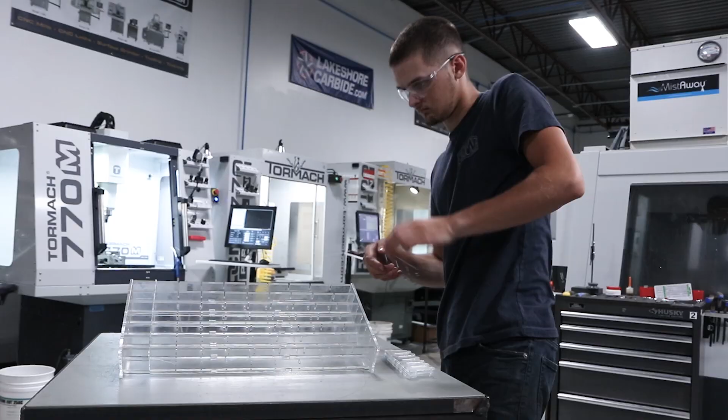Hi folks, let's walk through how we put together our Deltronic's parametric pin rack. I think this project is awesome because it really highlights just how powerful and amazing parametric CAD can be. And I think this sort of a storage device can be really helpful for any machine shop.

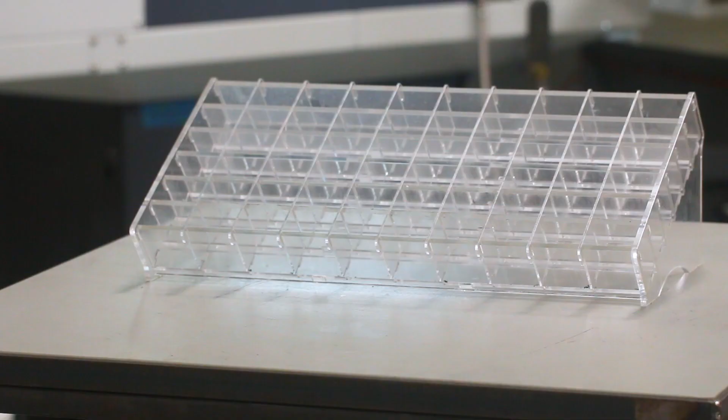The one you see here came out of a need to organize these Deltronic's pin gauges. We care a lot about the diameter of the bores on our Saunders Machine Works fixture plates. We machine them with a digital boring head, and we want to hold a really accurate tolerance. So we use a combination of metrology tools to check those diameters.

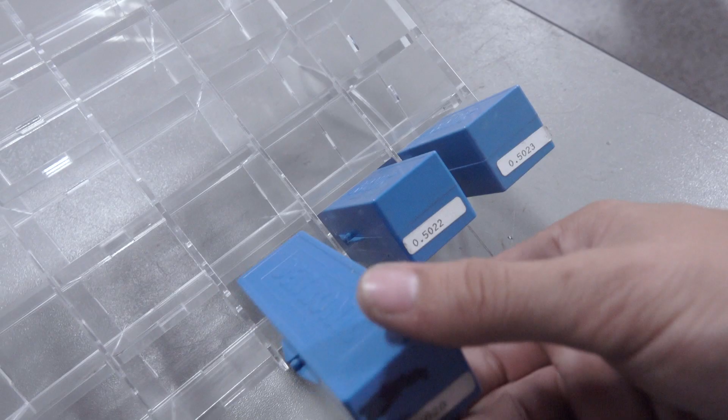The way in which you hold a bore gauge or the way in which you sweep it across can actually give you a slightly different reading. As we collected more of these gauge pins, though, I realized we need a way to organize these. And so Ed came up with this rack.

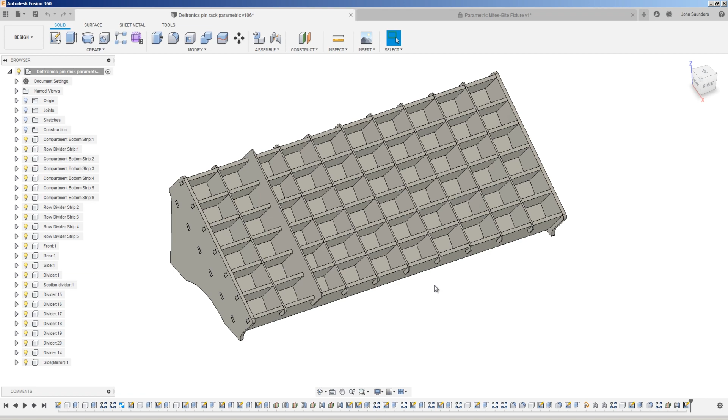And the reason I think this project is awesome, and we're sharing the file on the NYC CNC site, is under Modify, Change Parameters. This whole rack is built with user adjustable parametric values. So it literally takes seconds to update the number of bins, the width, the rack height, the angle, the depth, the dimension, the thickness, which makes this an awesome tool.

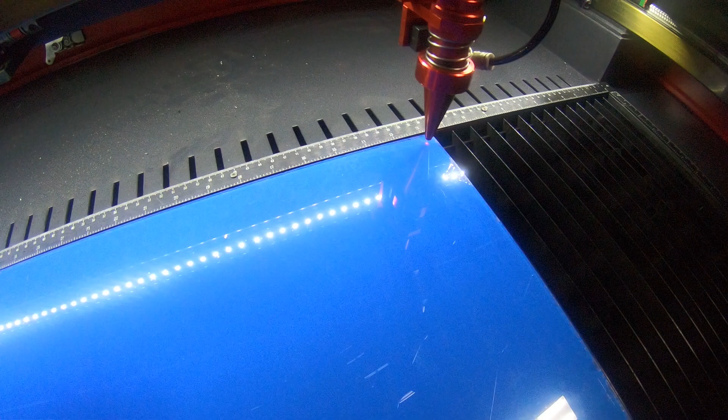And if you have a CO2 laser in your shop, you can make one of these for incredibly cheap. If you don't, you can either sub it out, send it out to a shop that has a laser, check out a makerspace that has a laser, or you could also make one with a 3D printer or a CNC machine, especially a router style, but really it's best suited for a laser.

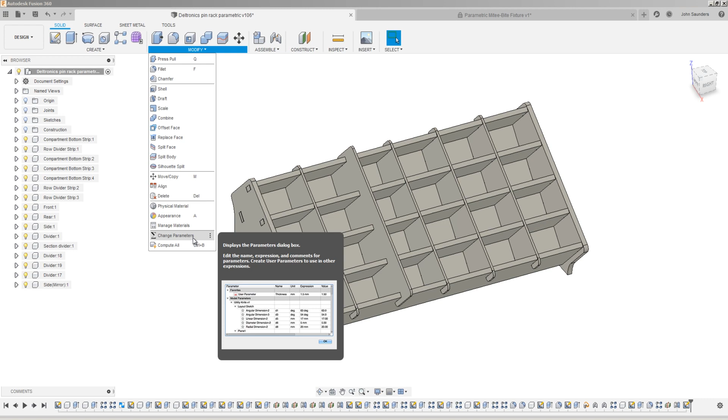So if you've never seen this change parameters or user parameters before, let me walk you through a really good example. If you head into your Fusion 360 data panel, scroll all the way down to CAM samples, work holding, yours truly, Saunders Machine Works, we created this parametric Mitee-Bite fixture. It's a relatively simple fixture that you can build.

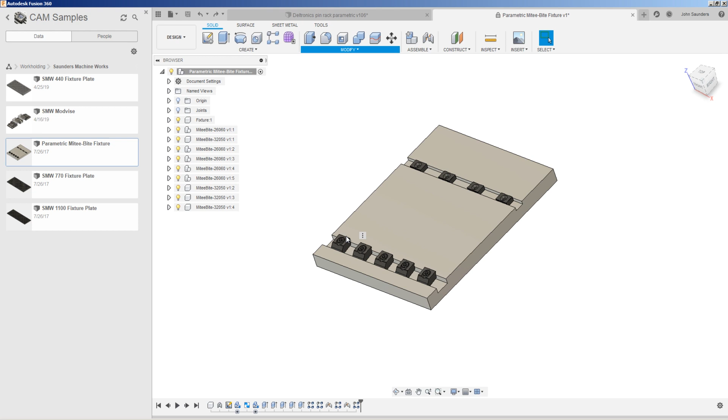It can be mounted directly to a fixture plate or held in a vise, but it's a good example of the value of using user parameters because we designed this so that it's much more intuitive for you to go in and make modifications. So having everything named with an intelligent name, a name that means something, makes it much easier to make edits to this file.

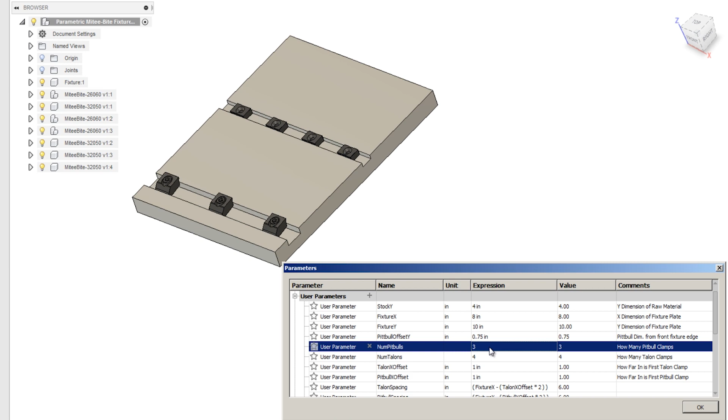So in this case, I have a stock Y of 3 inches. So that's the piece of raw material that we're putting in here. Let's say it's actually 4 inches. Update that. Everything moves. Let's say we're only going to use 3 pit bulls and not 5. Hit 3, it adjusts. Hit 2, it adjusts. Hit 5, it goes back. So we're going to adjust how far in is the first talon grip. Let's change that from 1 inch to 2 inches.

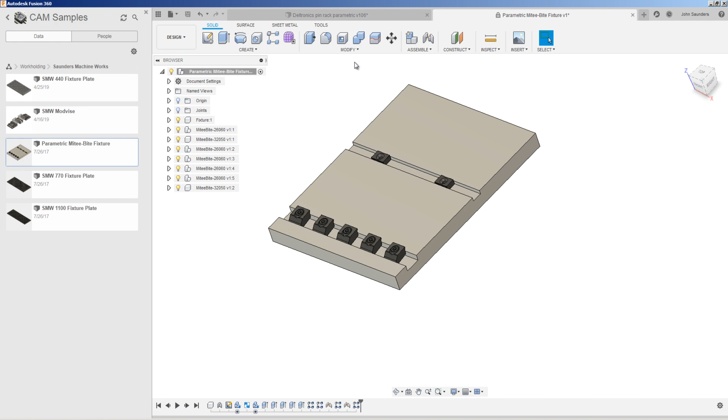It moves them in. Let's say you're a knife maker and you're building a knife and you're thinking, well, I don't need parametric values because we're not going to be updating these over time. Let's say the pivot pin diameter is always going to be 0.236. Well, I would argue think about still using that because it can really help as you're building out your CAD file or working in a team environment.

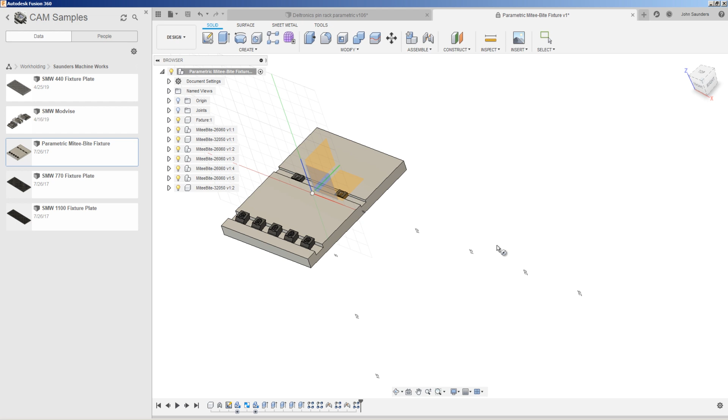Let's create a user parameter called pivot dia, and we'll say it's inches 0.236, and we'll say the comment pivot pin diameter. Now, when we go to say model up our knife handle, and let's say we've got our handle and we create the pivot pin circle, instead of using an inch value, just start typing P and it auto-populates a list of your user parameters.

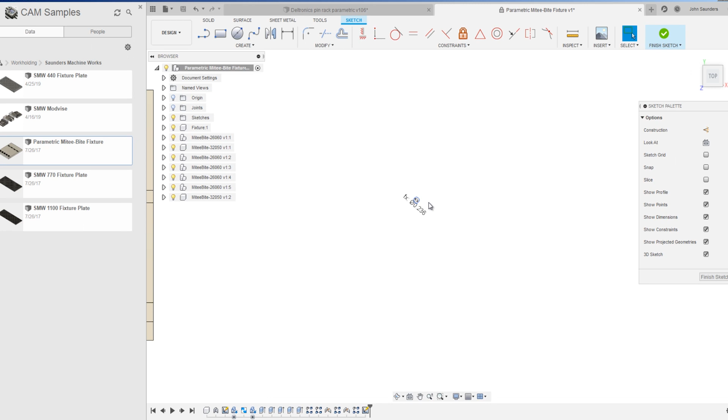Come down here to pivot diameter, hit enter, and now it's listed as FX 0.236. But if you double-click it, you can see it's listed as pivot diameter. When you're then designing another component or another sketch that references this, you can use that pivot dia, or you can even take it to the next level by doing something like change parameters, new parameter, pivot clearance, and we'll say 0.0005, 5/10, click OK.

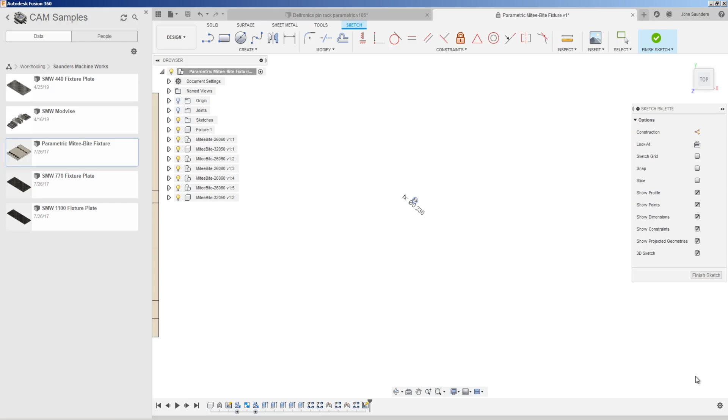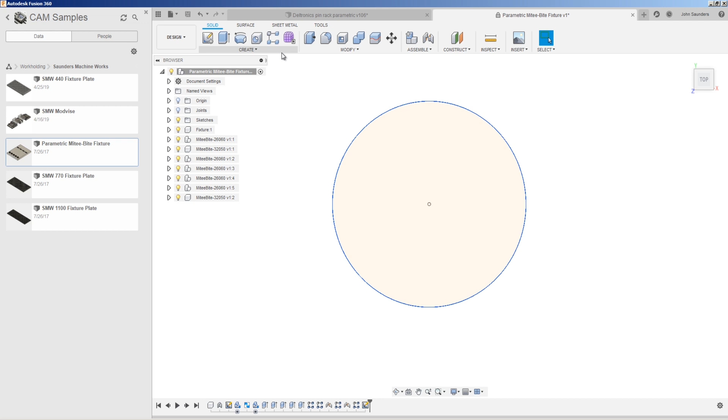And when we're designing its mate component, we could say pivot dia, pivot dia plus pivot clearance. And then when you're working with your drawings or your manufacturer or within the team and you realize, you know what, that's just too tight, we need to change that. You don't have to find this sketch, you don't have to go hunting, just come into your list, scroll down to pivot clearance and change that to 7/10, or in this case, let's make it extreme so you can see the difference. 2 thou, 0.002, like so.

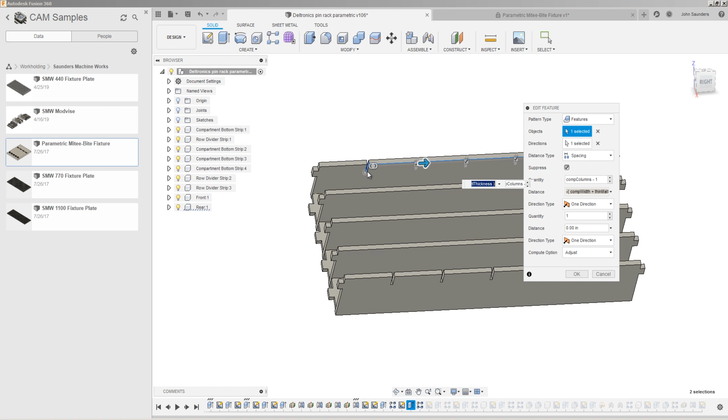But it's the patterns that are really tricky. It took us a while to figure these out and get them to a relatively stable and consistent behavior where you've got each little notch correctly spaced, correct intervals, matching the other patterns of the other dividers or components. So I would encourage you to download this file, poke through it. There's some pretty clever and pretty creative formulas. And again, I don't want you guys to have to reinvent the wheel. So download this, run with it, modify it, make it what you want.

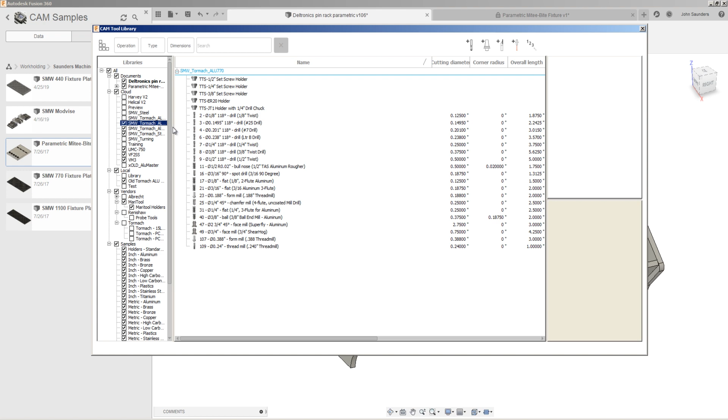The next thing I want to do is build a duplicate one of these, but for our tools. So for us on the Tormach, I have about 15 core tools. I like to have the tools set up in good condition and know that they're tools that I can use, especially when I'm using our sort of preset templates or tool libraries. That way I can program offline, get to the shop, make a part, and not feel like I've got to find a tool, set up a tool, etc. But what's nice sometimes is if the tool's already in a holder, I might want to leave an extra pack of inserts or the actual end mill box or a duplicate of that tool set up assigned to that tool number per se.

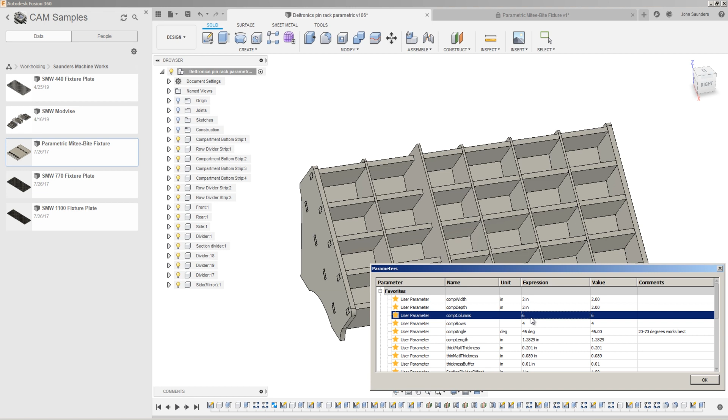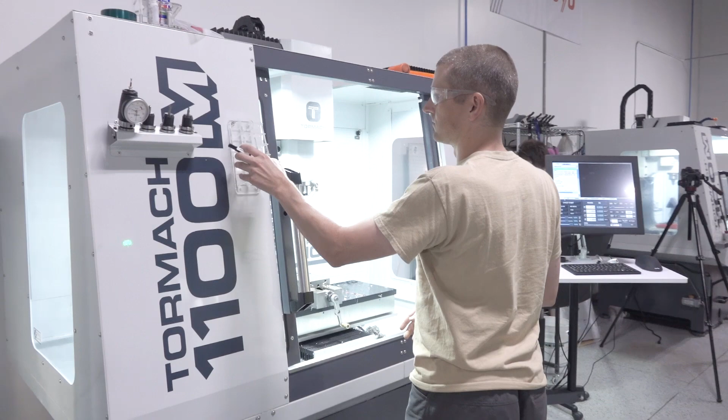So my plan is to make a smaller rack like this. In fact, I really only need it to be 15, so let's make that edit right now. 3 by 5. I think I like the shape a little better because it takes up less footprint. We can adjust the angle. I might actually mount it on the machine itself rather than have it on a cart. And now I've got a little cubby hole, and I always know that this will be spot number 3 right here for that tool. Or if I have to take a tool out to steal a holder for a new tool, I can put that tool back there, and I know that's always my tool number 3.

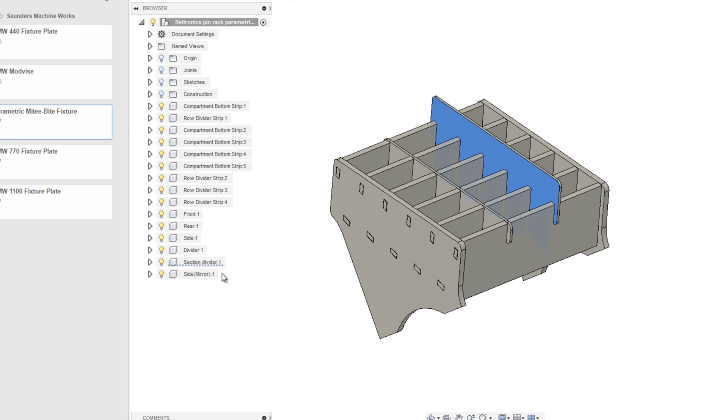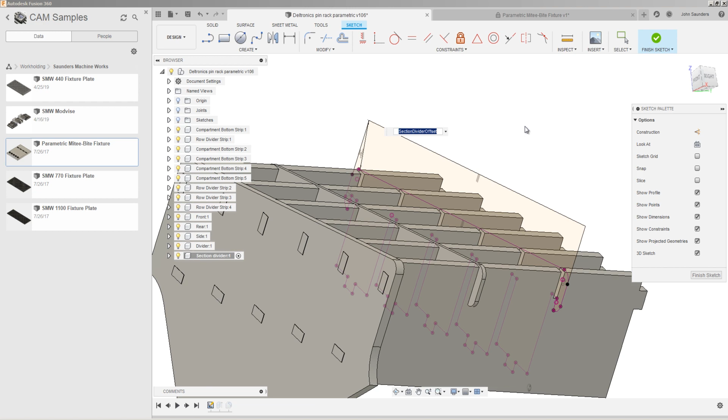And if you're wondering why this one's a little bit taller, we added a divider to separate out our metric gauge pins, which is, I think, another great example of it. Helps you see the design intent behind how a part was built and helps you more easily work on it or edit it. For example, on that section divider, if I click on it once, it underlines the little marching ants, so I see that that's the component for it. I could activate it, edit that sketch. It looks like it's just a number, but again, if I double click on the FX, you can see, okay, section divider offset is a dimension off a projected dimension, so that's clearly adding an offset to make that section divider slightly taller, which helps me understand, okay, that's how that was programmed, that's how that works.

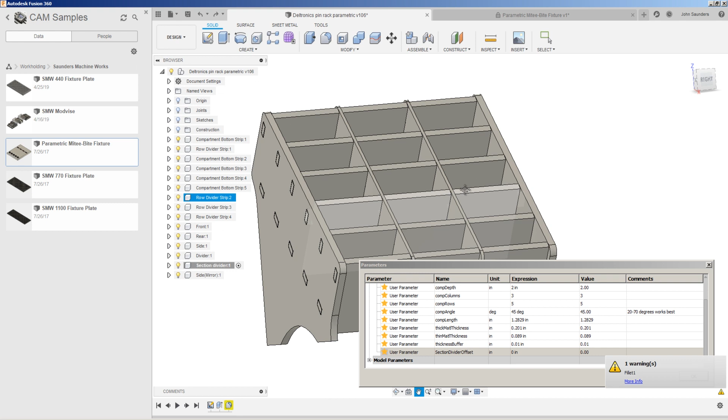Go into modify, change parameters, scroll down, say 0.25, still too tall, so 0.05, slightly taller. If we go take it all the way to 0, I think it gives me a fillet error when I do this. Nope. Actually, it gives me a fillet error if I go directly to 0. I'm not sure why. Oh, there it is. I just lost the reference edge.